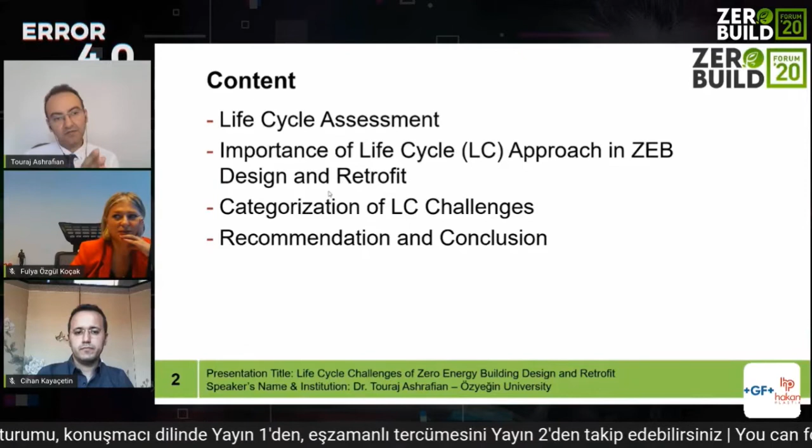I hope you can see my screen right now. This is the content of my presentation. I will start with life cycle assessment, then emphasize the importance of the life cycle approach in zero energy building design and retrofit, then make a categorization regarding the life cycle challenges of zero energy building design. At the end of the presentation, I will have some recommendations and conclude.

As you can see in this slide, we can divide the whole life cycle of a building into three main categories: manufacturing stage, operation stage, and end of life stage.

All of these stages have a variety of steps. For example, raw material extraction is the first step. Then, after extraction from a mine, we need to transport that material to the manufacturer factory, where the process will start. After that, we need to transport the material to the construction site. All of these steps require energy consumption, and when we consume energy, we have greenhouse gas emissions at the same time. Transporting material to the site and then constructing also consumes energy.

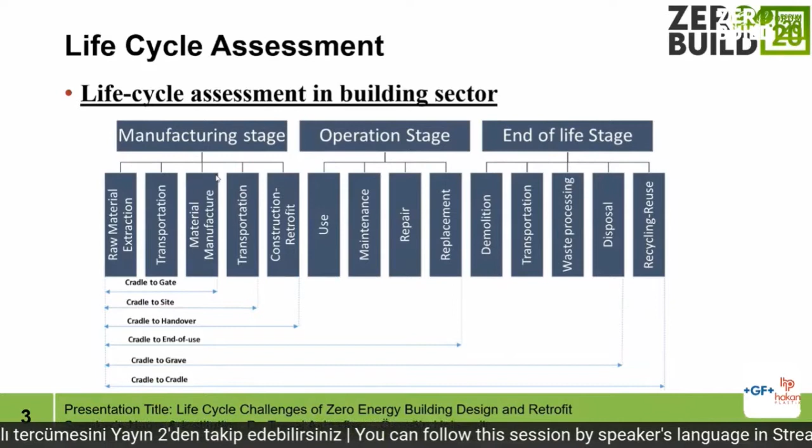Most of the time, we just think that our building is a zero energy building, so it's consuming zero energy and will not have any effect on the environment. But this is incorrect, because the pre-stage or pre-operation stage also accounts for huge energy consumption.

There are different approaches in life cycle assessment of a building. One of these is the cradle to grave approach, another is cradle to cradle. There are also other approaches mostly regarding the manufacturing stage, like cradle to gate, cradle to site, cradle to handover, or cradle to end of use. But the important ones for us are cradle to grave and cradle to cradle approaches.

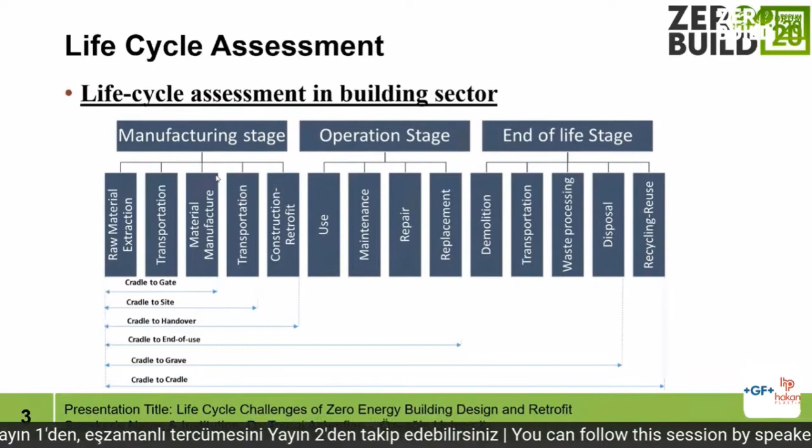In the cradle to grave approach, at the end of the building's life, the material becomes useless and is not worthy of reuse, so it goes to the disposal site and it's finished. But in the cradle to cradle approach, we can reuse the material, recycle it, and even upcycle it, changing the use place of the material. For example, we can recycle material and use it in a battery or in a car, and so on - it's not necessary to use it again in a building. These are two very important approaches for us.

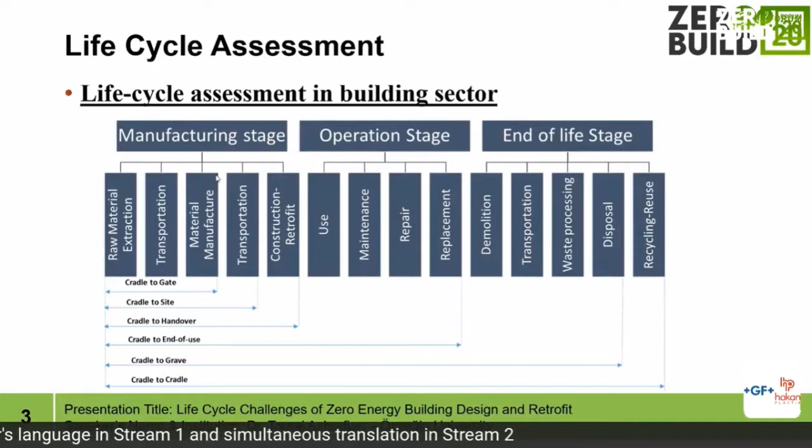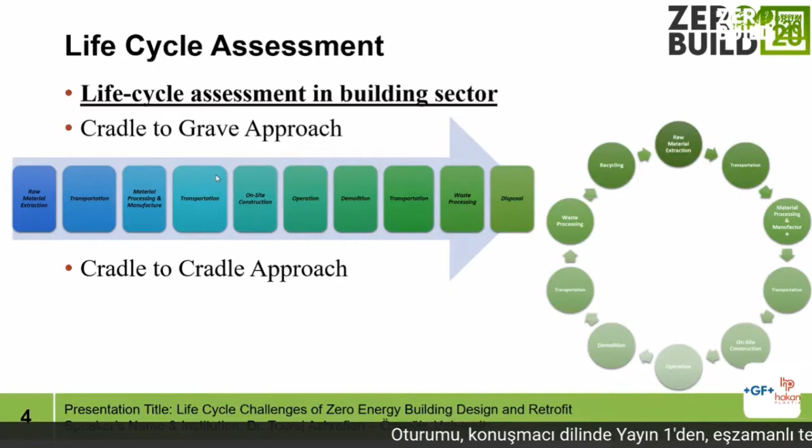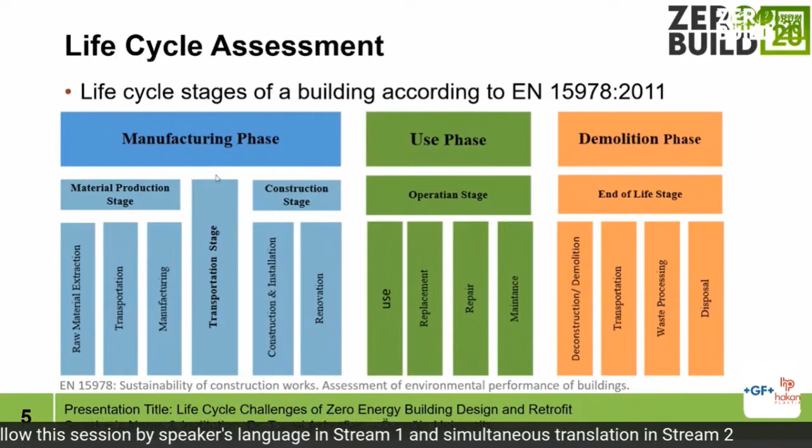So that's why I'm going to emphasize the cradle-to-cradle approach. According to the EN 15978 standard, we can divide the life cycle of a building into manufacturing, use, and demolition phases.

According to different standards and studies, the embodied energy, or manufacturing energy, of material can account for a huge amount of life cycle energy consumption of a building. Of course, the lifespan of the building is very important. For example, in Yohanis and Norton's study, where the lifespan or calculation period is considered 25 years, the embodied energy share is a huge portion of the life cycle energy consumption, about 67%.

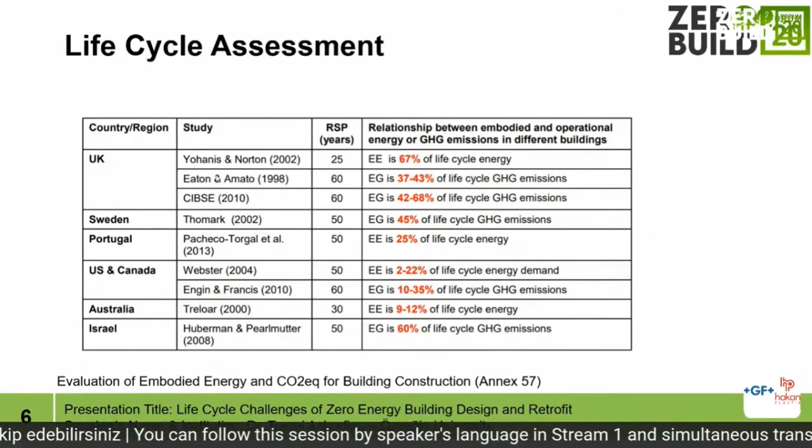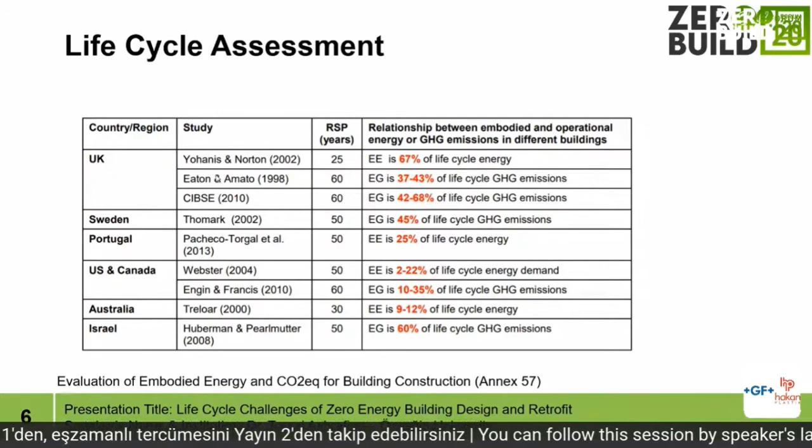But in other studies where the lifespan of the building is as high as 60 or 50 years, the total share of embodied energy consumption during the life cycle is as low as 25% or 45%. You can also see some lower percentages, like 2%, 10%, or 9%. But generally, we can say embodied energy consumption can be higher than 10 or 20%.

According to a study by Ramesh et al., conducted in 2010 and published in the Energy and Buildings Journal, the manufacturing phase or embodied energy consumption of a building can be about 10 to 20% of total energy consumption during its life cycle, while the operation period accounts for 80 to 90%, and the demolition phase accounts for 0.2 to 1% of total energy consumption.

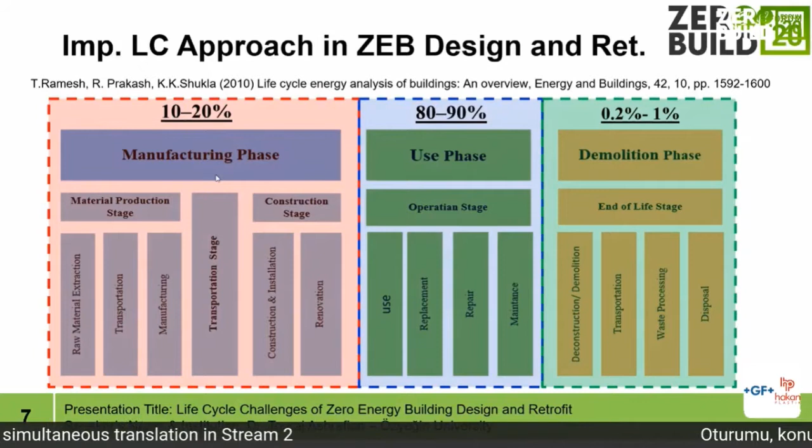That's why when we say a building is a zero energy building, we can just focus on 80 to 90% of total energy consumption. But we also have to have a glimpse of the manufacturing or pre-construction phase of that building, so we have to reduce that energy consumption and greenhouse gas emissions by using low embodied energy materials or systems.

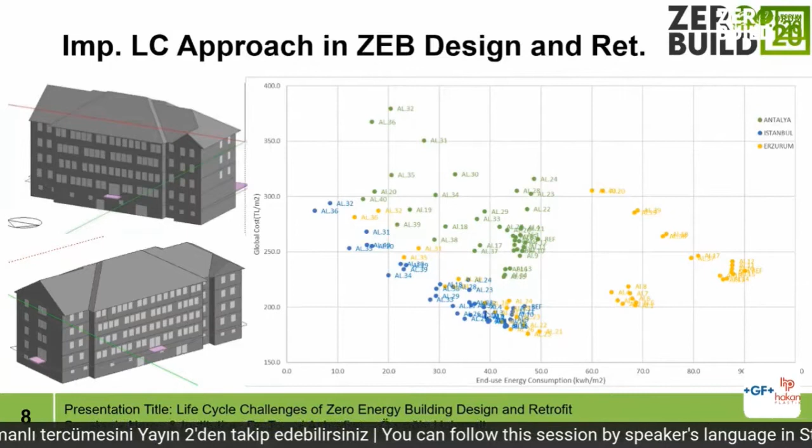But when we look at the embodied energy consumption, we can see that all of these measures have higher embodied energy compared to the rest of the measures and the case building. So it's very important to look at these values and focus on them. Otherwise, our results can be useless, or we may see adverse effects in our studies during the application period.

Also, in Turkey there are different climatic regions, so all of these regions may require different actions, approaches, guidelines and so on. For example, Istanbul is located in a humid, temperate climate, so it needs different measures and standards, while Erzurum is located in a very cold climate.

So the temperature difference, which is one important factor between Erzurum and Istanbul, may sometimes be more than 40 degrees centigrade. That's too high, and we cannot apply the same measures in Erzurum, Istanbul, Antalya, or Diyarbakır or other regions of Turkey. So it's very important to conduct a specific study for every region and city of Turkey. But the same is not applicable for most countries in Europe, because they are located in a cold climate.

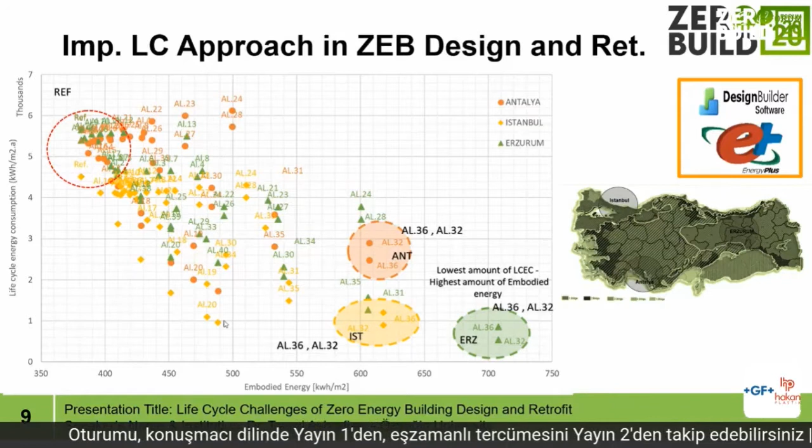There are two approaches in building zero energy retrofit. The first approach is to just use renewable energy sources and install them on the building. For example, we can use a photovoltaic system or thermal collector and so on, and just install it on the building. But it has a huge problem because it results in a high number of units.

We need to use an excessive number of renewable energy source units, like photovoltaic units. We need extra budget, and it results in higher cost. Also depending on this excessive material usage, the embodied energy or pre-installation energy of the building is going to be high. But of course, the application time can be reduced, and it seems as simple as that to study.

We need to just know which amount of energy consumption is occurring in that building, make a simple calculation, and then install the units. Of course, installation of those units is not easy.

In the second approach, first of all, we need to have a passive improvement. We need to reduce the energy consumption of the building with passive measures, like adding proper insulation level, insulation material on the exterior wall, roof, and also ground floor of the building, changing the glazing materials and so on, and then install the renewable energy system on that building.

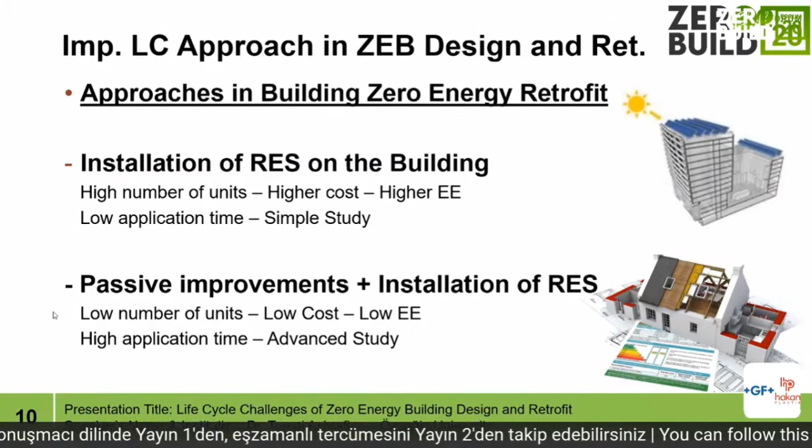In these measures, we just add an insulation layer. We choose a proper insulation layer for the opaque component and for the glazing system, and change the glass of the windows and add the insulation layer.

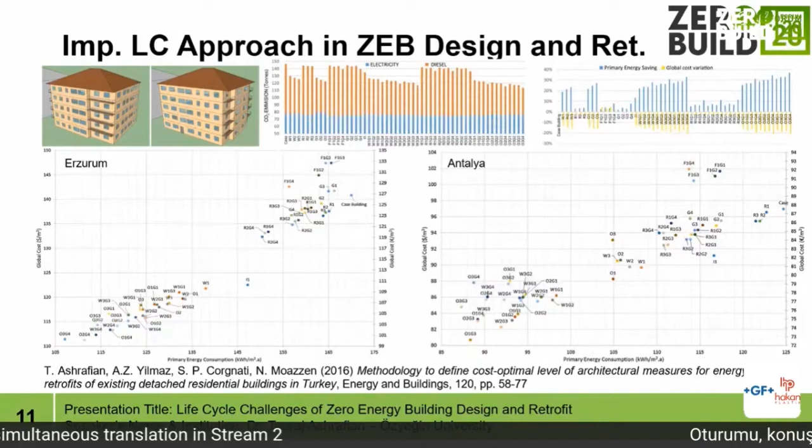If we want to categorize the challenges, we can see that there are scientific challenges, social challenges, financial challenges, legal challenges, and also technical challenges. I'm going to focus on each of these in the forthcoming slides. But shortly, scientific challenges are regarding studies, the different deficiencies about data, about the different steps of the study.

Social challenges are regarding the awareness level, willingness of the owners and users. Financial challenges are regarding the economy and budget required to conduct a zero energy retrofit or to design a zero energy building. Legal challenges are regarding legislations and market barriers that prevent those standards from being applied properly. On the technical side, we have problems about the know-how of the manufacturer, the laborers, and so on.

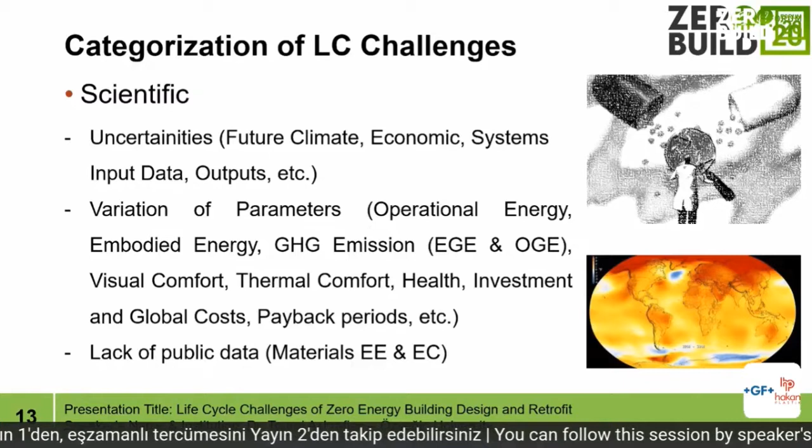Also, another problem is the lack of public data, especially in Turkey. There is little information regarding the embodied energy consumption and embodied greenhouse gas emission of different materials. In some countries, this data is public and easily accessible. But here in Turkey, it is a problem, and an influential one that should be solved and overcome.

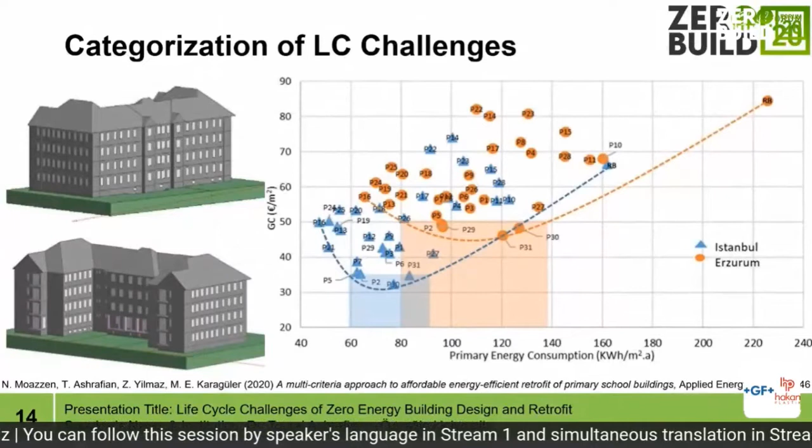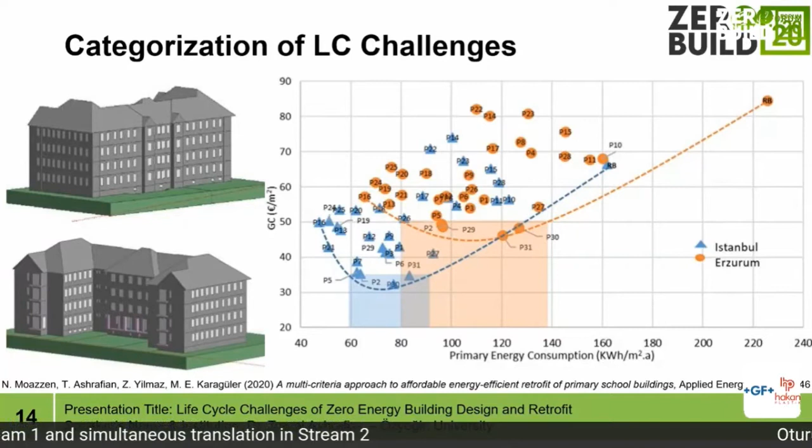This is another study on a typical school building in Istanbul and Erzurum, published in Applied Energy Journal this year. In this study, we tried to focus on different criteria and items. I'm sure we have forgotten to use some criteria, because as I said, there are lots of different criteria: cost, energy, embodied energy, payback period, and so on. But in this study, we tried to discuss these criteria and propose an approach to use all of them in our studies. These are the results of our study.

As you can see here, we have focused on the total cost, carbon emission of different measures, payback period of different measures, and also the comfort level of different measures that we have chosen and applied in this primary school building. After conducting such a study, we have decided which of these measures can be applied.

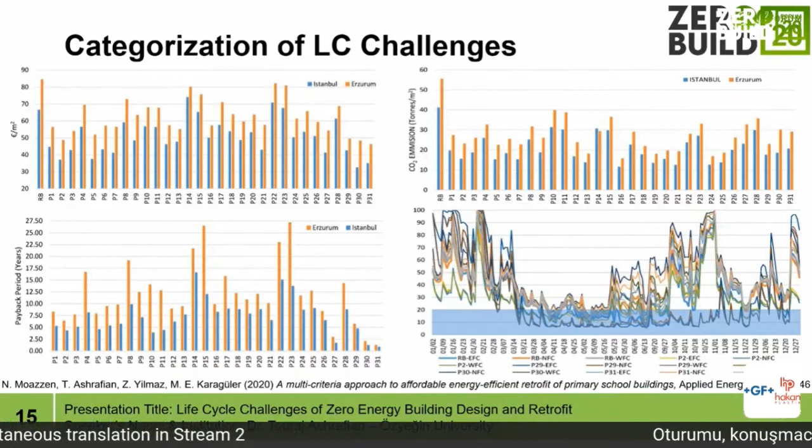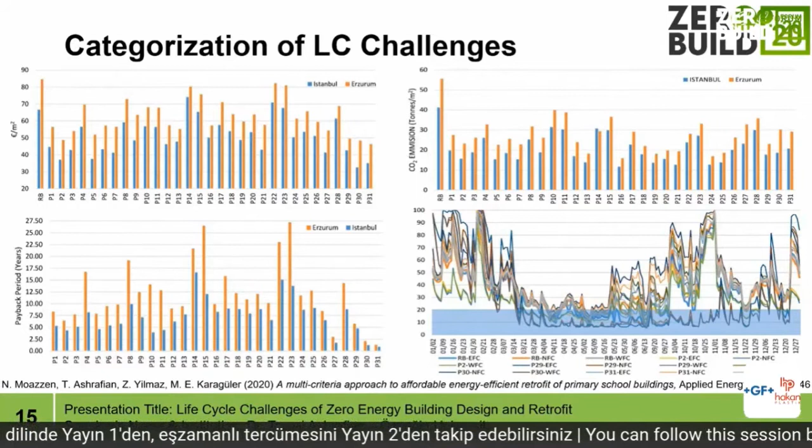But during our study, we have found that some measures that reduce energy consumption and lead to lower cost may increase the discomfort level in our building. So we have to have a balance between the different items to choose a more applicable and better measure to apply to our building.

In the social side, we have a huge problem regarding user awareness and occupant willingness, and we can overcome these challenges with different trainings and educational activities.

But sometimes, if we increase the awareness level of the occupants, they may be reluctant to get involved in the retrofit action, because for example elderly people are most of the time reluctant to involve in such an action because of the disturbance level, the time of the application, and of course the budget.

But we have to try to solve our challenges. If we increase the awareness level, maybe they try to find some budget, maybe they are encouraged to involve in the retrofit action with their own budget. But we need to do it, we need to increase the awareness level.

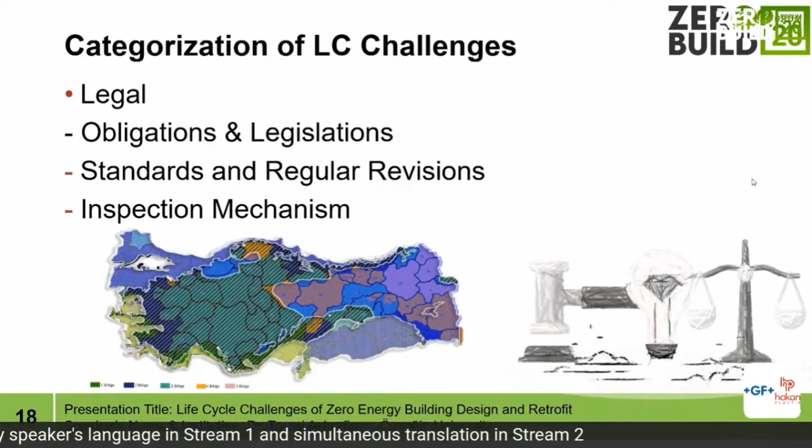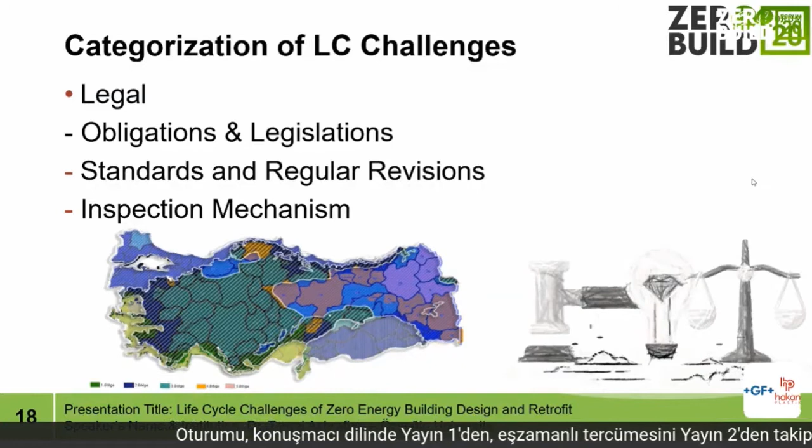But most of the time, some standards remain for 10 or 20 years, and it is incorrect to have such a standard for a long period. Also in Turkey, for example, we have just a standard regarding insulation level, while we have to have extra standards regarding total energy consumption, regarding the systems, and so on.

In the technical side, apart from the know-how of the labor and auditor, we are faced with high technology requirements and also difficulties in the inspection and monitoring mechanism. Also, we are faced with problems and barriers regarding the tools.

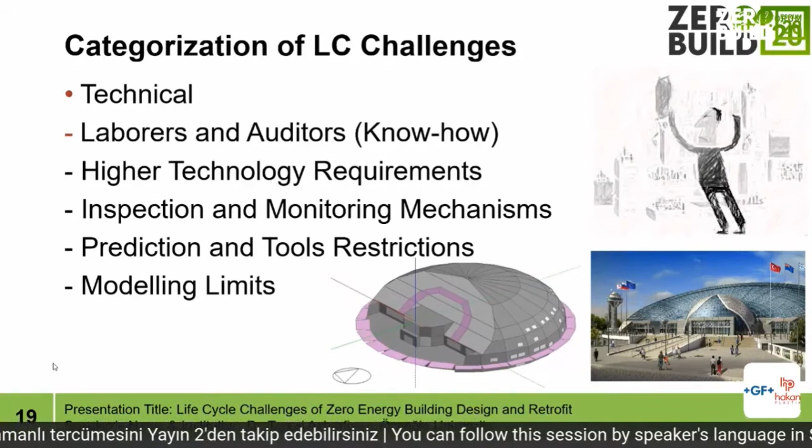For example, in this study, we have tried to model this building, but this is the output of our modeling. As you can see, it is different than this one. Of course, the result may not be very different, but we don't know. Maybe it can be different if the tool let us model the exact things in the modeling process. But we guess the result cannot be very different, though it is also a limitation of our modeling. So we have to also try to find a proper model.

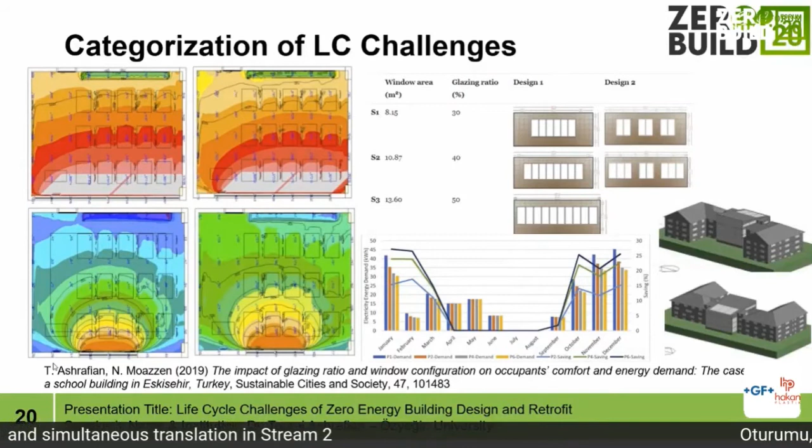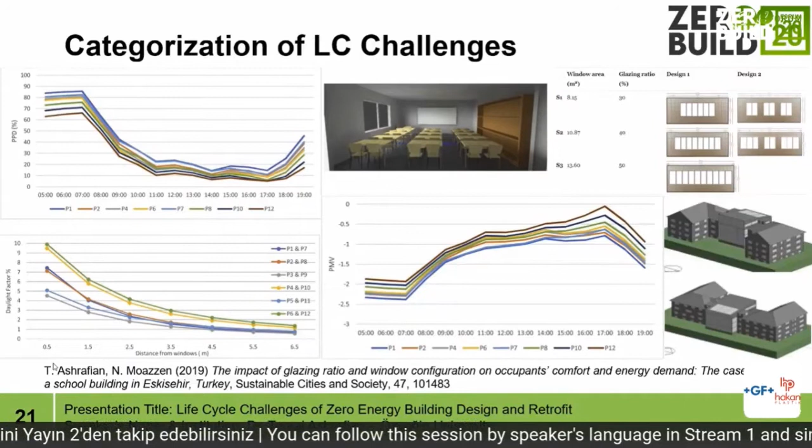In this study, we chose some different glazing or different transparency ratios, but we couldn't model on just one tool, one simulation software. We need to use different simulation software to decide about the comfort, visual comfort, and also the energy consumption of this school building. So if we have one combined simulation software that is advanced in all parts of this study and analysis, it could be very useful.

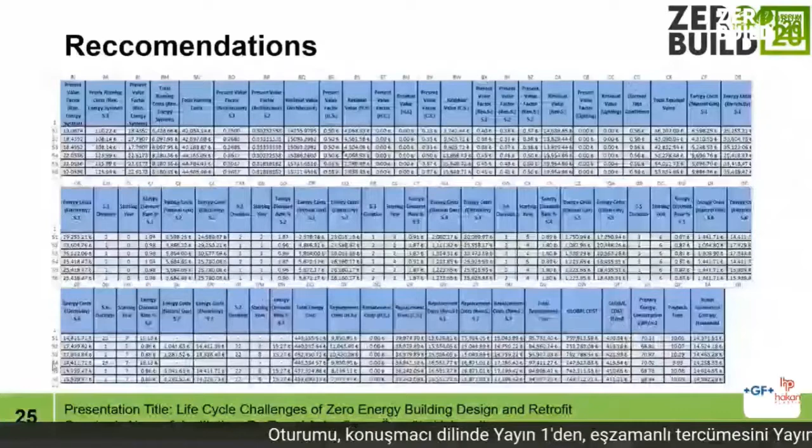Our recommendation to overcome all of these challenges is to find reliable data. This is, I think, my last slide, so I will be finished in 2 or 3 minutes. The reliable data is very important, and we need to find reliable data.

It is my recommendation for Turkey to publish free and public data regarding the embodied energy and embodied carbon of different materials. We need to increase the public awareness through different training, podcasts, TV broadcasting, and etc.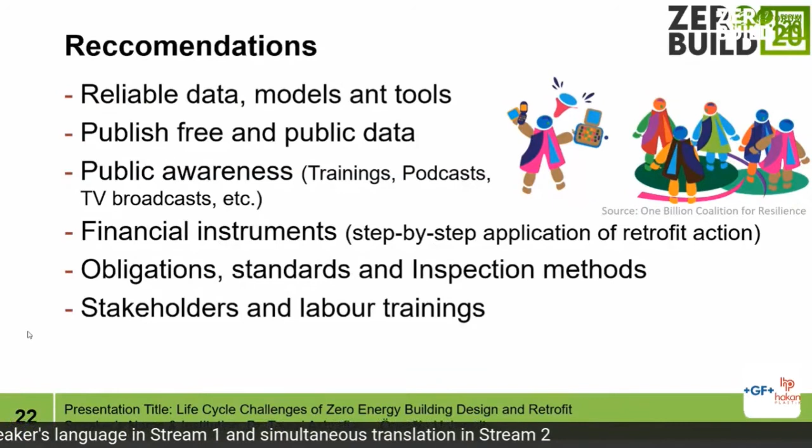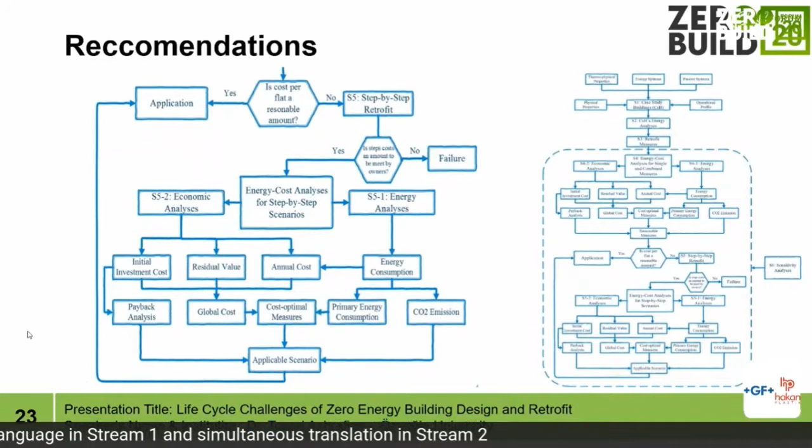Financial instruments like step-by-step application of retrofit action can be recommended in this step, and also different obligations and standards are necessary to be published and taken into force. And also we need to have some training to increase the know-how of the laborers and workers in this subject.

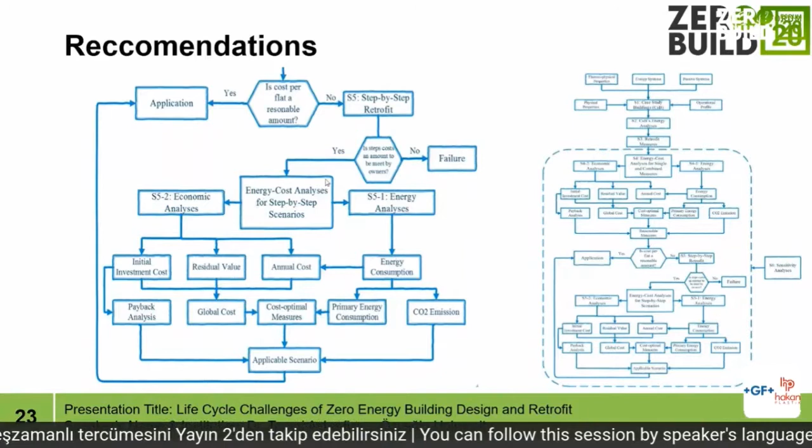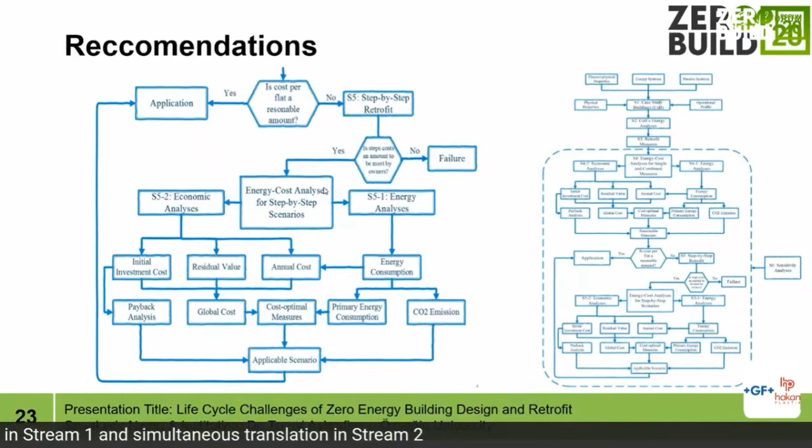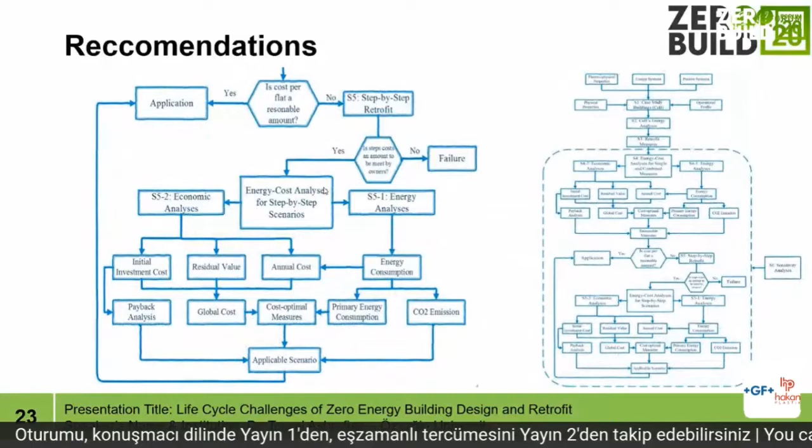As you can see here, during one study we decided to have an extra process in decision making for scenario choice and measure application. In this study we decided to divide the proper measures into some steps, and this is the process that we take for deciding about proper measure.

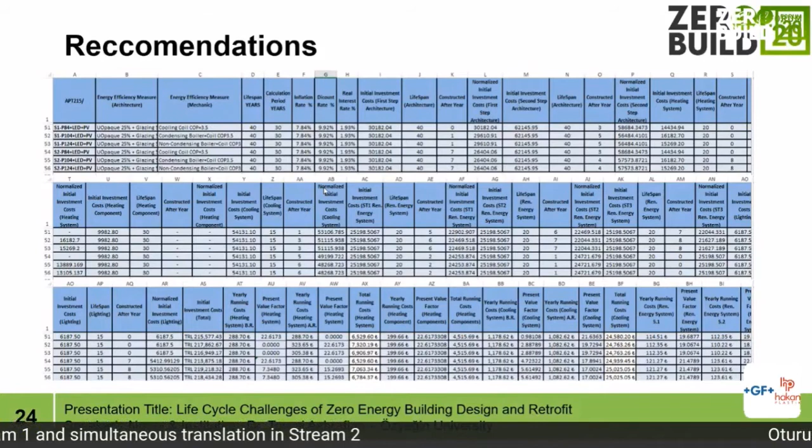And this is the process that we take to calculate the total cost, the total payback period, and total cost of our application. It is very difficult and it is very time consuming.

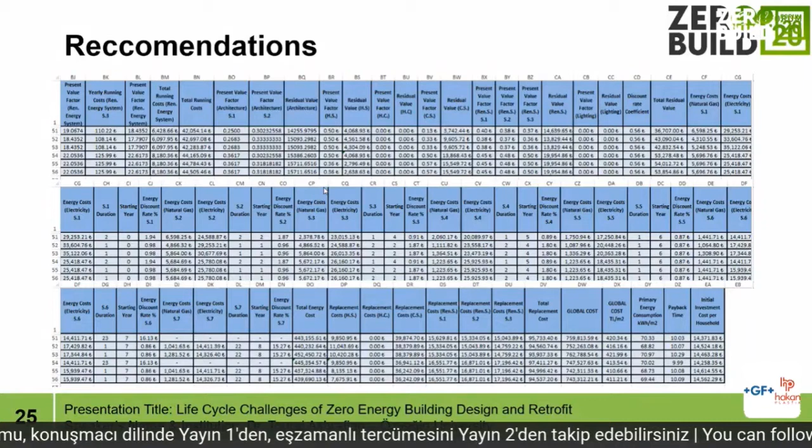But of course, with the aid of this study, we could reduce the initial investment cost and the amount that should be paid for the retrofit action to a reasonable amount that may encourage the owner to get involved in the action with their own budget.

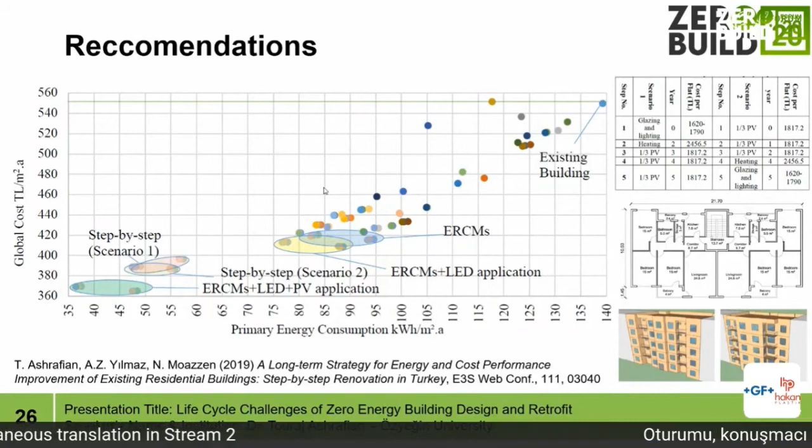And in this case, the financial system, the financial process can be easier, and with the aid of just small credit or any other governmental encouragement, the owner can get involved in the action easily.

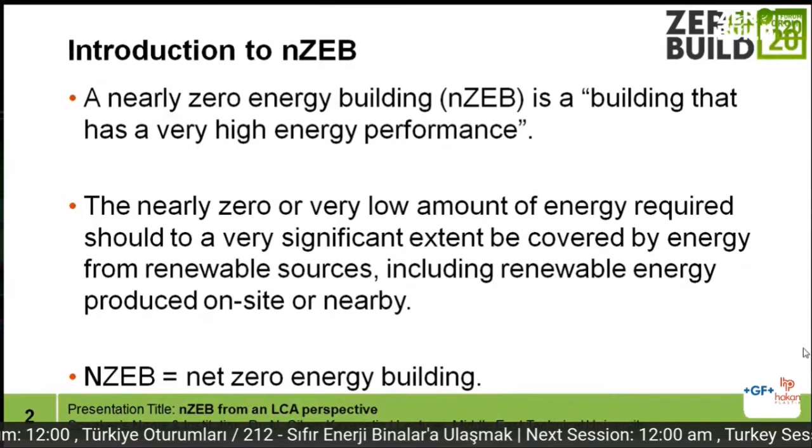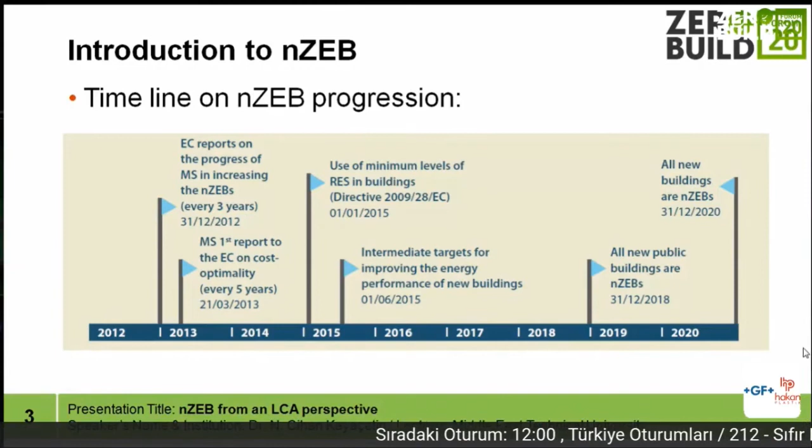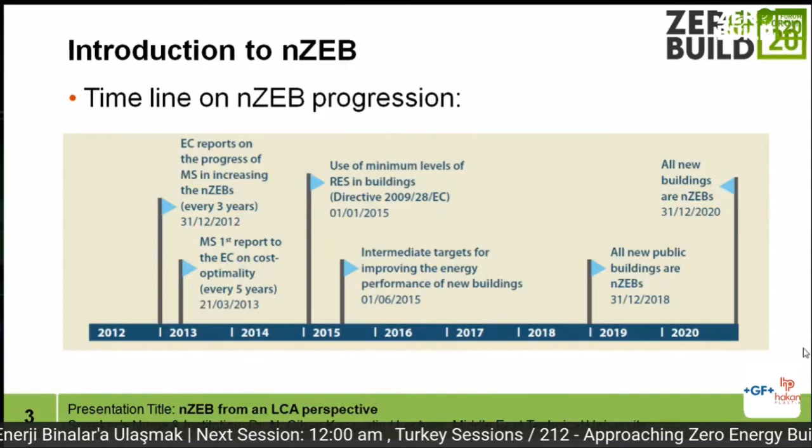Meaning that you can see the NZEB progression here. So until 2020, European countries were planning to create an NZEB building stock and start to create that, but it's also ambitious for Europe, and some of the deadlines have been extended with 1 or 2 years. And there is no single approach for achieving NZEB.

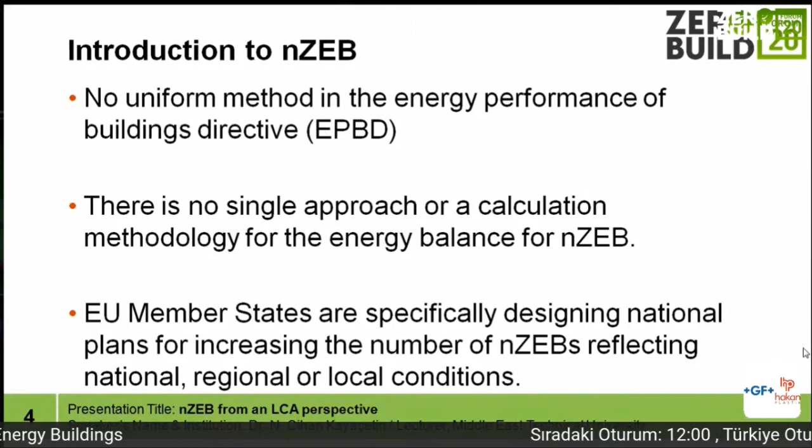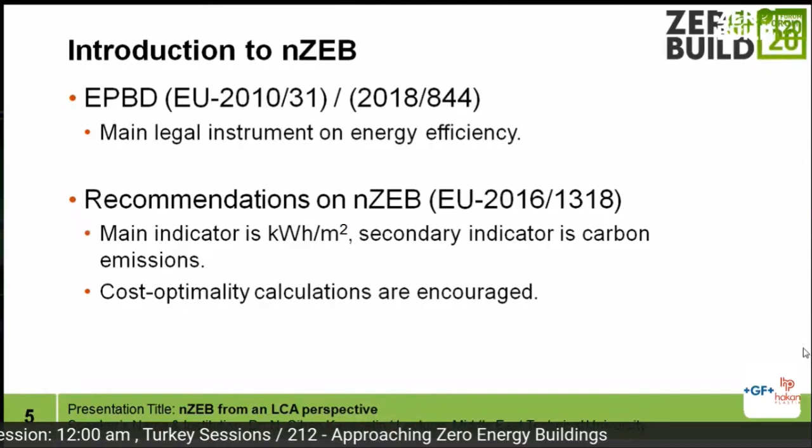This actually gives us leverage to adapt it to a better definition, which may include the production or end of life scenarios of a building. And of course, the European Union directive suggests local authorities come up with their own local solutions. The main instruments that we have for NZEB are the directive in the European Council, and there are some certain recommendations, but not one specific solution.

So I will get back to the life cycle perspective and NZEB, how it actually focuses on the operational energy, but it should include embodied energy if the definition says net zero energy buildings, or if not, then it should actually be called net zero operational energy buildings to give the exact meaning.

That's the actual problem that we are having with NZEB buildings when we consider the whole life cycle phases of our buildings. We only consider heating and cooling for our needs, but actually there is more energy that is put into producing the bricks in your building, or even the mechanical and heating systems of your buildings.

So here the punchline is the embodied energy.

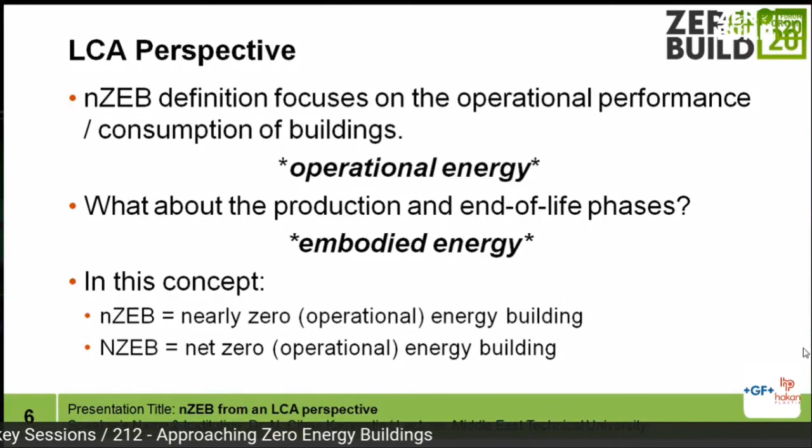As Professor Ashrafian clearly explained the life cycle stages, I will not go through them, but what is important is that this is a circular process, so it doesn't need to end.

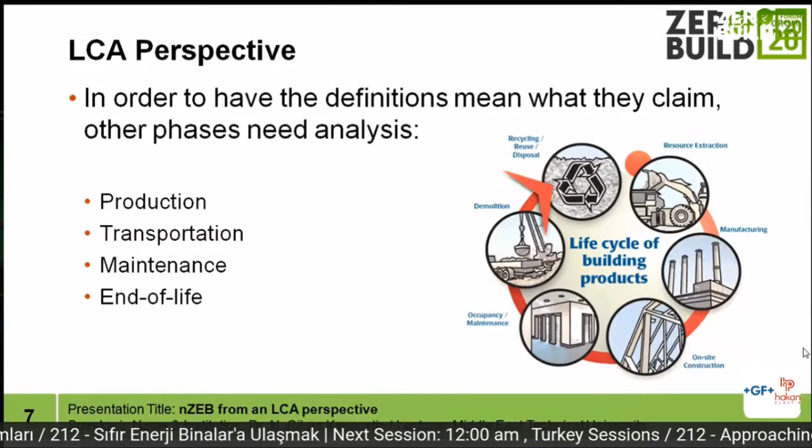The process of building construction doesn't need to end at a specific place. It can go over and over again, and you may use the materials for an extended lifetime, which would actually decrease its impact on the environment in the long term.

In the previous decade, the ratio was different. Buildings were including less material, like less insulation materials or thin wall components, or a single glazed window. That's why the embodied energy was low, and the operational energy is naturally high, because the materials weren't acting as efficient as insulators as we have now.

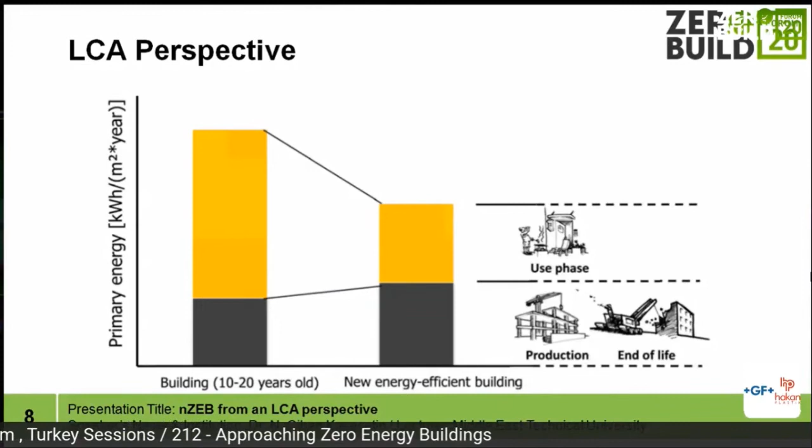So again, the significance of embodied energy - I mean, we can keep on talking on this, but what will be the solutions, or what are the problems that we face with this?

So the current directives and regulations require the contractors and engineers to put more materials into the building, because the regulation tells you that your buildings should perform better. Of course, there are multiple ways to achieve a more efficient building, but the industry tends to use the more straightforward, cheapest solutions. Of course, when we say cheapest, it depends on how the monetary value is evaluated.

Let's take an example of insulation materials. You can import the best insulation material from a country abroad, doesn't matter in this current global industry. But when you do that, right now you don't actually pay 100% for the environmental impacts of this material. That's why actually some materials are cheaper, because they use probably hazardous materials which are not currently being penalized or taxed.

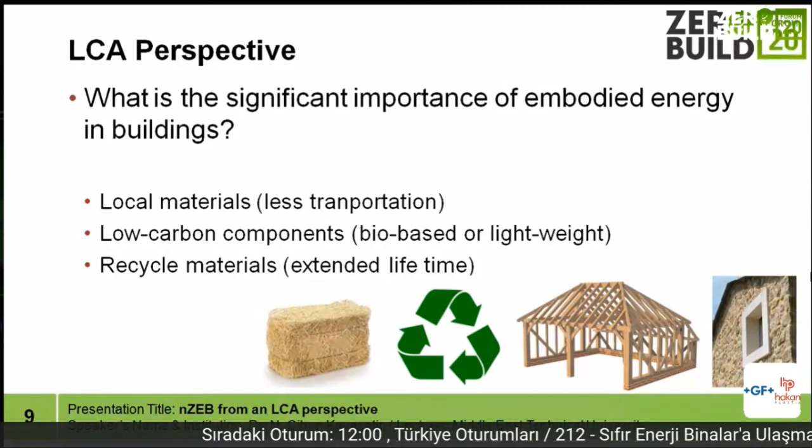And this is actually a dilemma. We've been talking about increasing the efficiency of buildings, which means we are trying to decrease the operational energy, but to do that, we need to put more material, and that increases the embodied energy. So there should be an optimization of the two, because just imagine we apply 40 or 50 centimeters of insulation to all the buildings in Turkey. Just imagine the necessary amount of production for this material. This would mean a sudden impact on global warming with the carbon we emit during production.

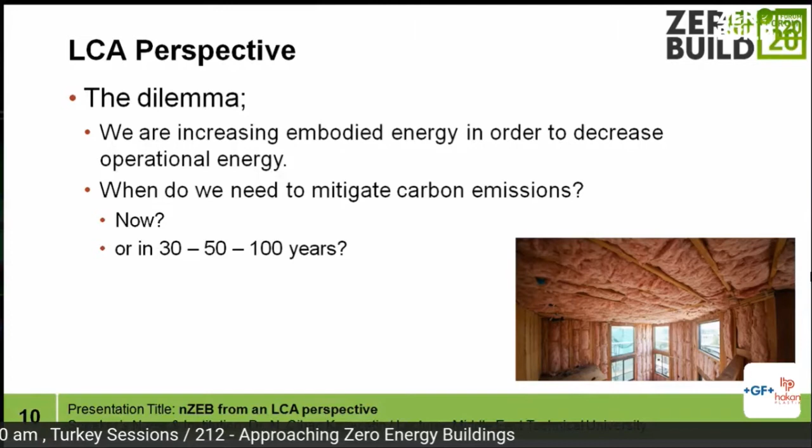And then the question is, when do we need to mitigate carbon emissions? If we say we should do it now, then we cannot produce lots of materials. But then the question is, when do we need to mitigate it? It could be 30 years, 50 years, 100 years, but as Dr. Ashrafian said, 100 years is too late. So we need to have an optimized solution.

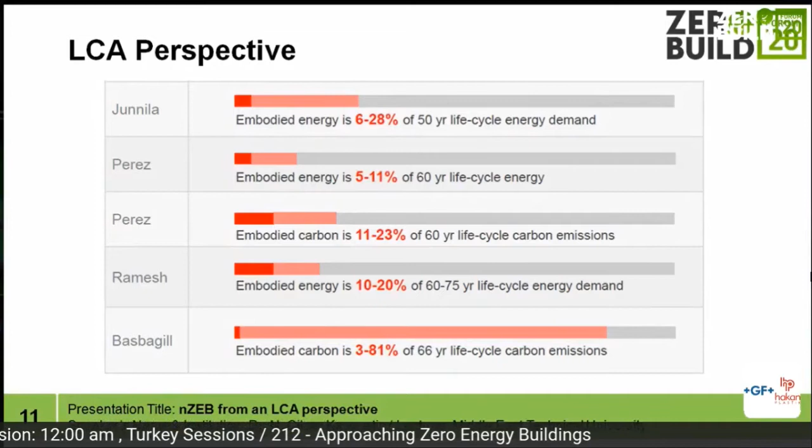I will skip this because these are already given, but we can say that the embodied energy in buildings is on the increase, and we should be careful about how much we increase it. In recent research, we see that less insulated buildings have around 70 to 90% operational emissions, which is actually the previous decade's information. So now in our current decade, efficient buildings have almost 50-50 between embodied and operational emissions. On top of that, insulation materials now increase in quantity in buildings, so it increases the embodied emission. In certain cases, only the insulation material can account for up to 20% of all embodied emissions.

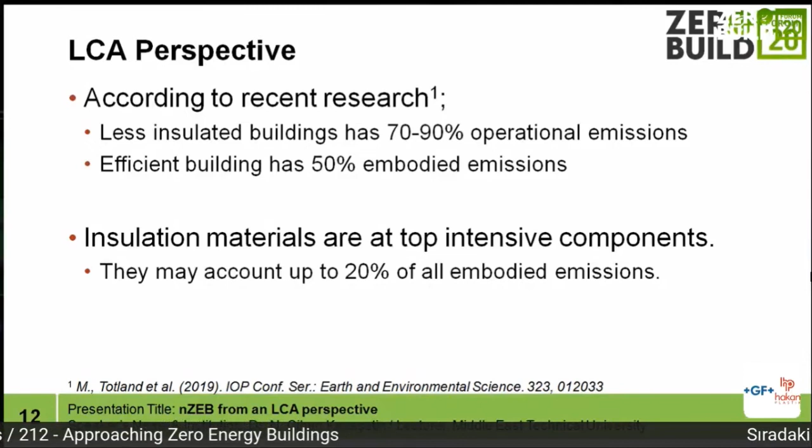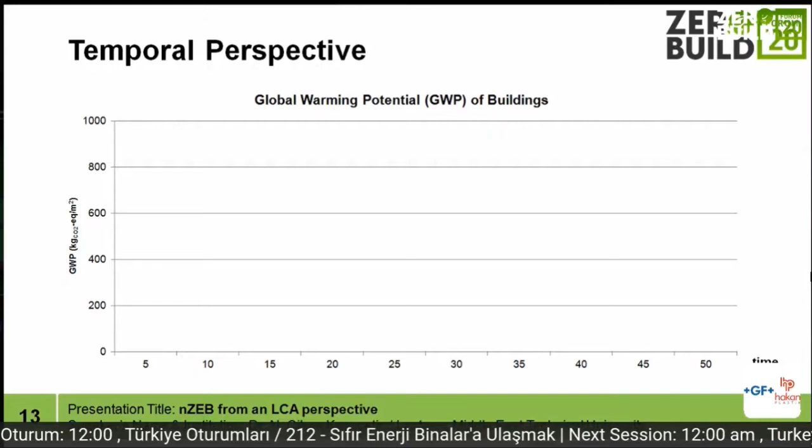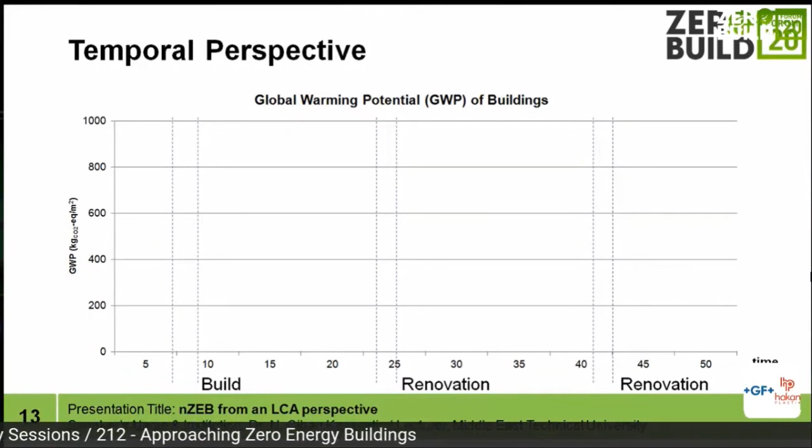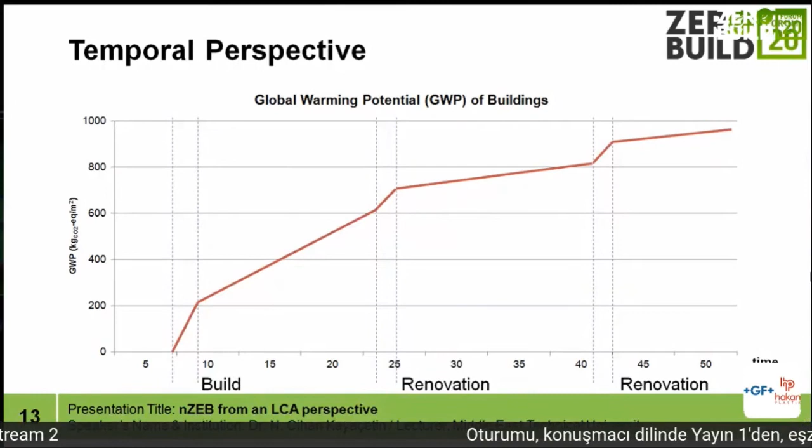And then I will brief my explanation with a graph of possible building scenarios. We will have a building construction and two renovations in 50 years of a building's lifetime. So what you see is a standard building: you build it with relatively low material, you don't put too much focus on energy efficiency, and it lives for some 15 to 20 years, and you need to renovate it. You put some more materials, remove some materials, and then you see that between 25 and 40 years, the energy consumption actually decreased compared to the previous 10 to 25 years, because you put in more material and probably better materials. Then it lived to 40 years, and you do a second renovation, and at 50 years the building's life ends.

But what if you do a more efficient building? At the start you put in more material, maybe double, but then the building acts better and doesn't need maintenance like a standard building. So you put in more material, but the building acted properly without a second renovation, and you see that the total emission ends up less than a standard building.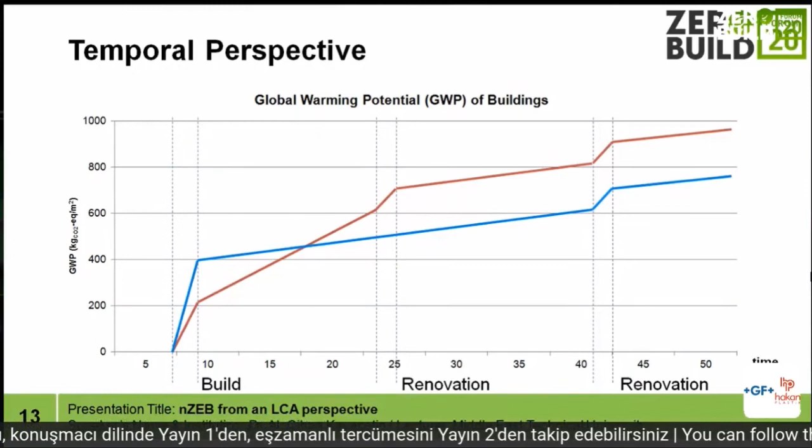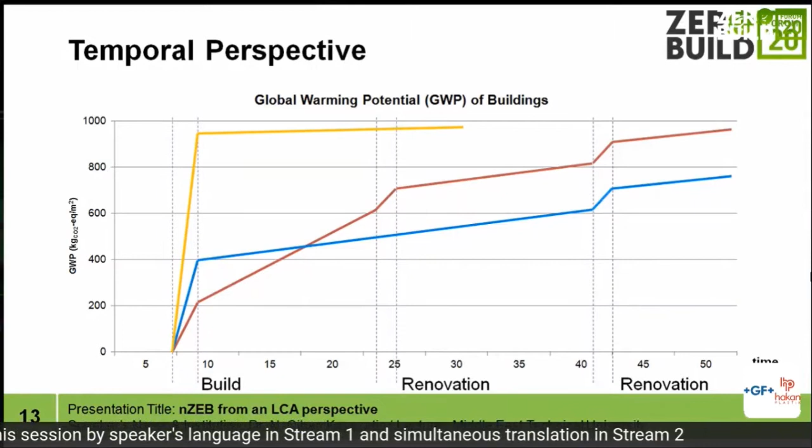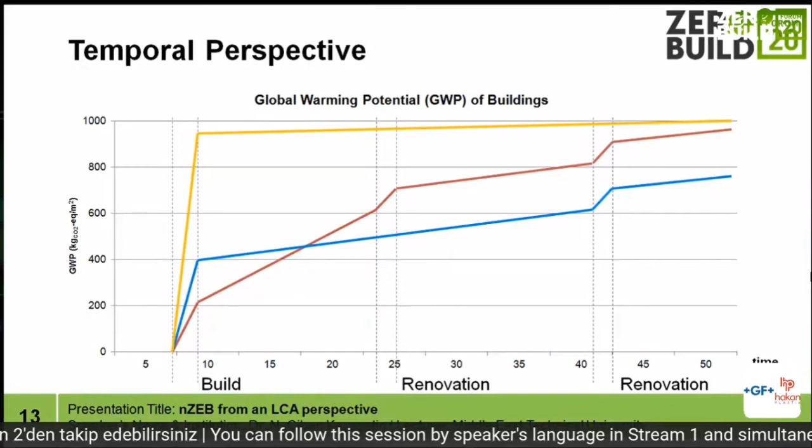But then what if I spend all my money on my building? I want the best one, but I just exaggerated it. I put everything I can find to make it a zero building, or very nearly zero. But then, as you can see, even if you increase the performance of your building, you might end up with an increased amount of emissions overall when combining the embodied energy and operational energy. And this is what we don't want, we want to avoid this.

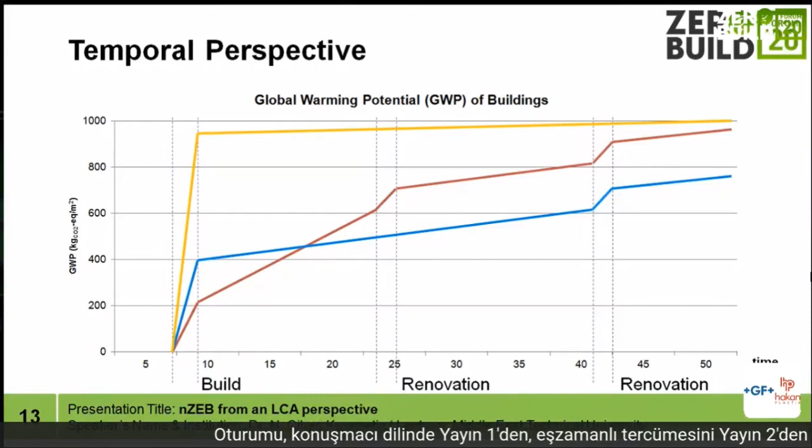So that's why we need to take care of the production phase of a building and the end of life phase of a building.

So I'm finalizing my presentation.

So there are many frameworks for an energy efficient or nZEB building. We all see that in LEED, BREEAM, and now more are coming, but they have limitations, and for good reason, because as in the presentation we see there is lack of data, lack of expertise in the construction field regarding the environmental data of building components. But we need to have a comprehensive perspective. We have to have it, because I'm sure some of our audience remembers the ozone crisis around the 90s. As globally the problem was fought and reduced, but have we forgotten about it? I don't think so, because ozone depletion is an impact category in life cycle assessment, as well as water, as well as acidification of land, which prevents agriculture.

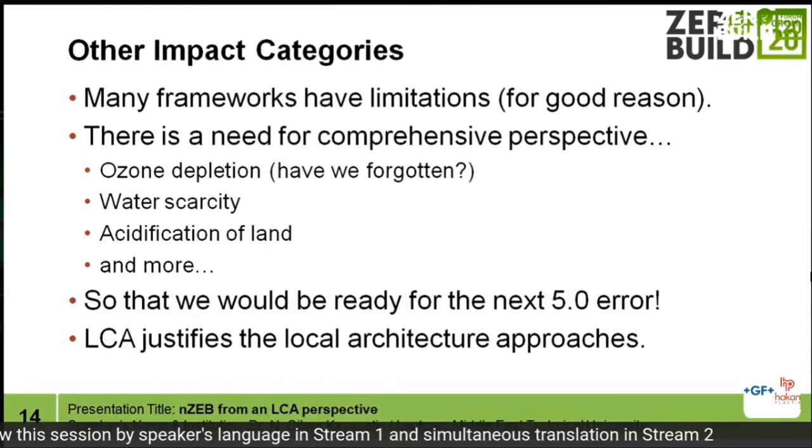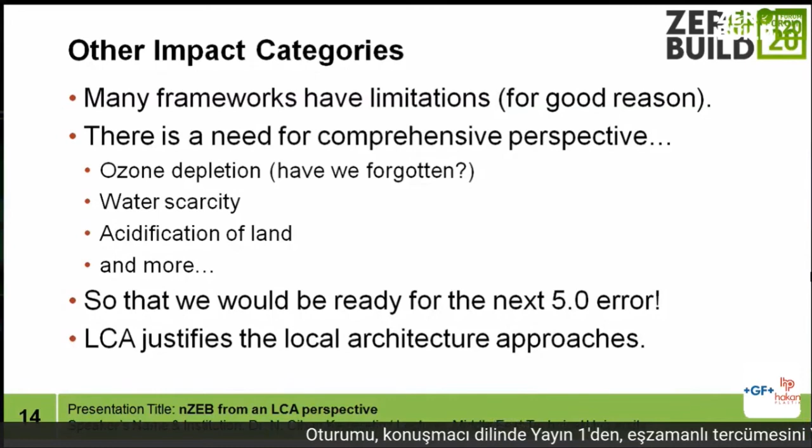And these need to be taken into consideration, as well as energy and carbon and global warming, so that we will be ready for the next fifth era or sixth era, whichever it will be. But then, as a final sentence, I can say that life cycle assessment, when we take into account the recent studies, justifies the use of local architecture and local components. So we can use this quantitative approach of life cycle assessment to justify what was already being said for years. So I find this very valuable. And I thank you for your time and this opportunity that you give me for this presentation.